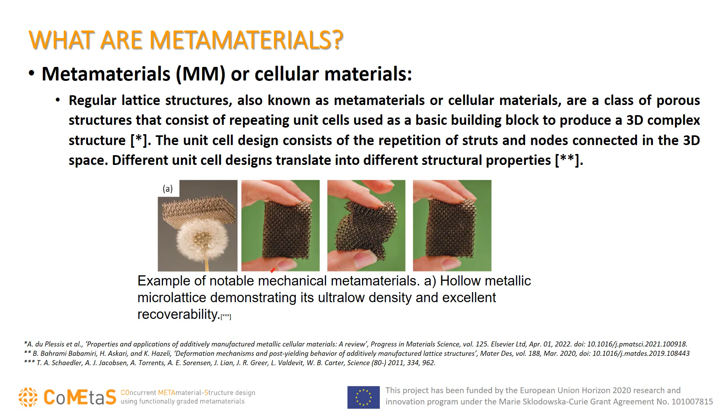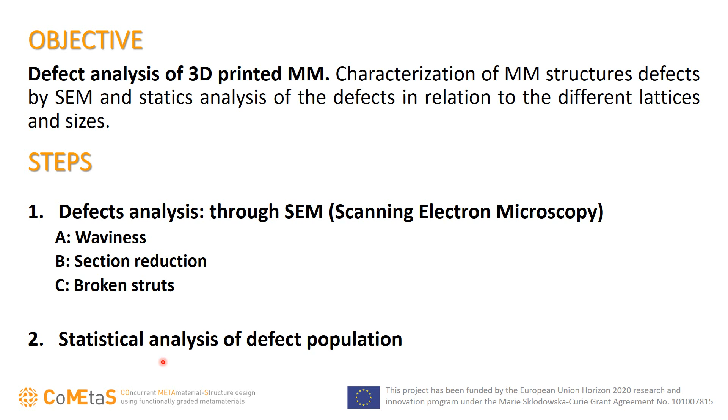The objective of my stay was to study defect analysis in the 3D printed metamaterials. Defect analysis was carried out by scanning electron microscopy, which covered the examination of 3 types of defects within the lattice structures: waviness, section reduction, and broken strut. A comprehensive statistical analysis was then applied to assess the population of the defects, which provided valuable information on the structural integrity of the materials.

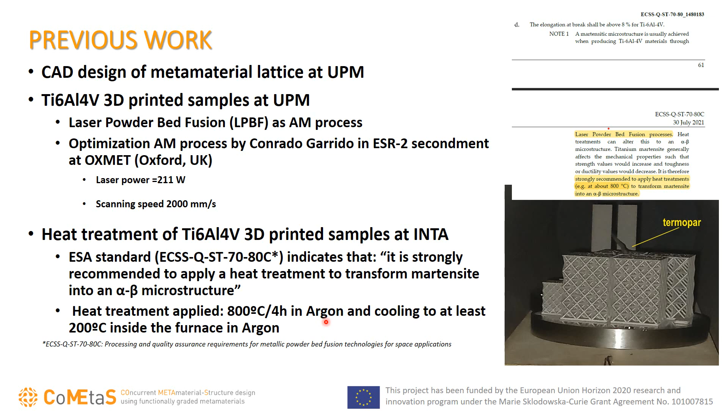Prior to the stay, preliminary work had to be done, which consisted of the design, the printing, and the heat treatment of the lattice structure, which we can see here. The lattice structure was designed and manufactured using laser powder bed fusion technology at the Polytechnic University of Madrid, then heat treated at 800 degrees Celsius for 4 hours in argon atmosphere at the National Institute for Aerospace Technology.

This is the list of the lattices which present various structures that we can see here. The study covered 4 different lattice geometries that we call unit cells, representing the metamaterial structures: FCC, face centered, octet, cubic, and fluorite. And here is the photograph of the samples that I took with me to Georgia Tech.

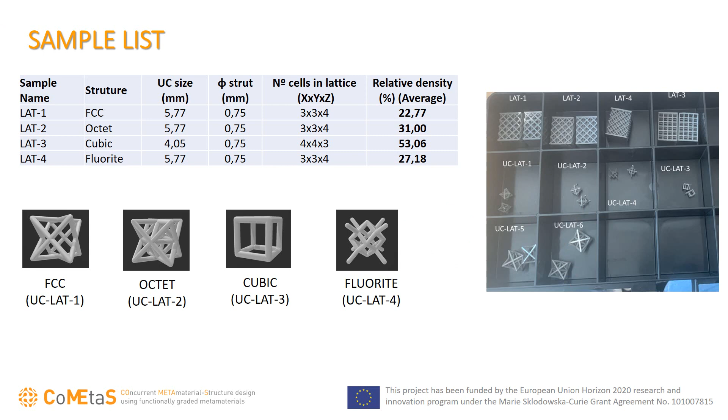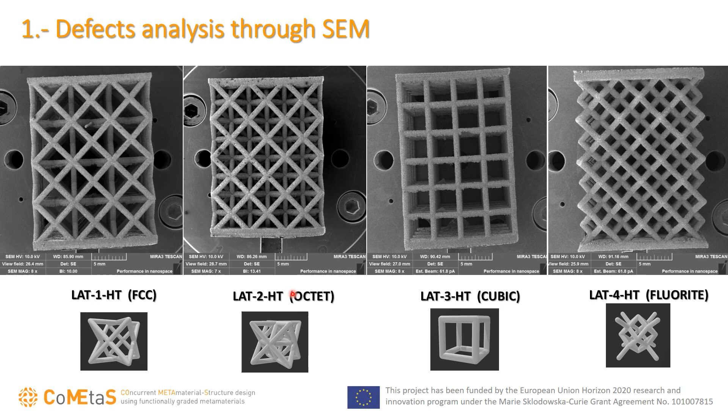Later, during my stay at Georgia Tech, I studied the defects with the SEM. These are the SEM images showing the 4 types of unit cells. As an illustration, only one of the 4 faces is presented here, but meticulous inspection was carried out on all 4 faces. These 3 images that we can see here are examples of the result of defect inspection in the SEM. The SEM images showed defects in samples of waviness, section reduction, and broken strut.

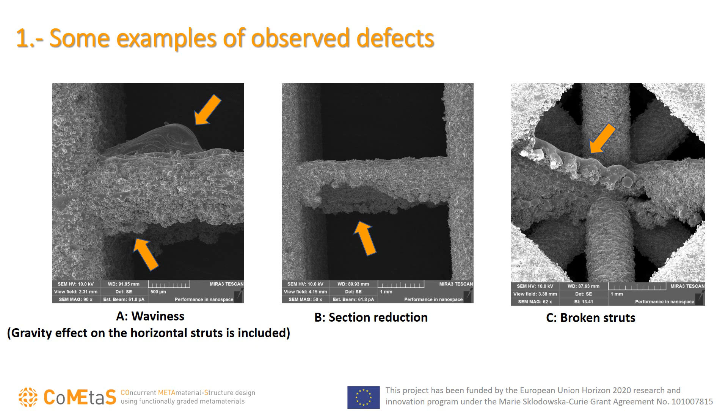A general defect was also observed, the effect of gravity on the horizontal struts, that strongly affects the waviness. Also, other general defects were observed, such as unmelted particles on the surface and the previously mentioned effect of gravity on the horizontal struts.

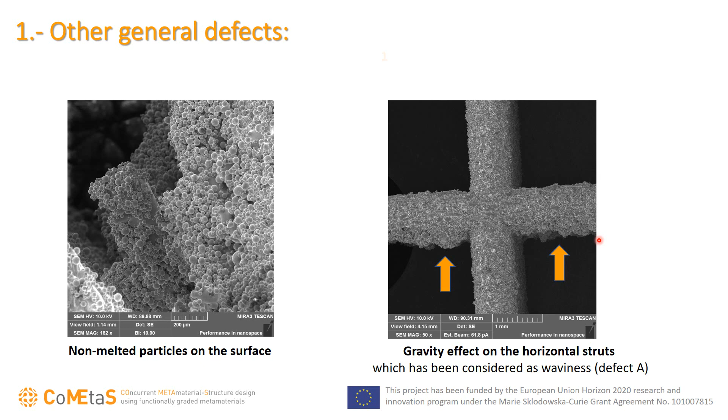Then section reduction defects are most prominent in the horizontal orientation as well. In particular, lattice 1 stands out with the highest incidence of section reduction defects among all lattices, underlining the importance of addressing this specific defect type in this orientation. Broken strut defects only manifest in the horizontal orientation. Notably, lattice 1 shows the highest number of broken struts. As a general conclusion, strut orientations play a significant role in determining the types and severity of the defects. For instance, all lattices present more defects in the horizontal orientation, except lattice 4. It does not have any strut in the horizontal orientation.

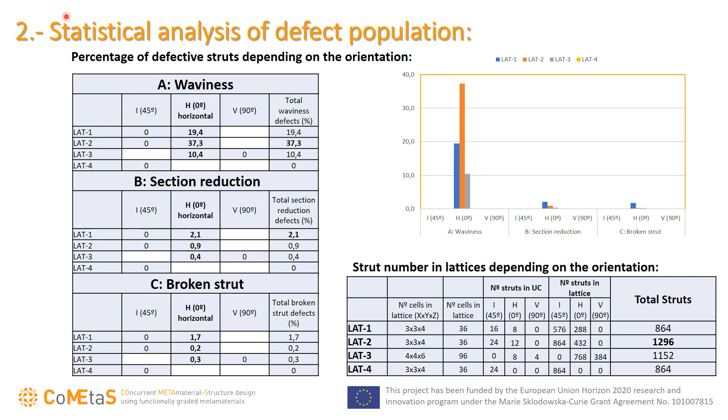To conclude, 4 different types of lattice structure have been designed in order to study the relationship between the defects and the 3D printing input parameters. A defect analysis study was performed by SEM to analyze the defects on the additive manufactured metamaterial structures. The defects were classified into 3 groups: waviness, section reduced struts, and broken struts. Other defects not included in these groups were observed, such as the non-melted particles on the surface.

The application of statistical analysis contributed to a better understanding of the combination of lattice orientation, number of struts, and defect type. Lattice orientation plays a significant role in determining the types and severity of the defects. For instance, all lattices exhibit more defects in the horizontal orientation except lattice 4, because it does not have any strut with the horizontal orientation. To conclude, the impact of this experience on my career has been substantial. The knowledge and the skills that I acquired during this secondment will contribute to my future productivity.

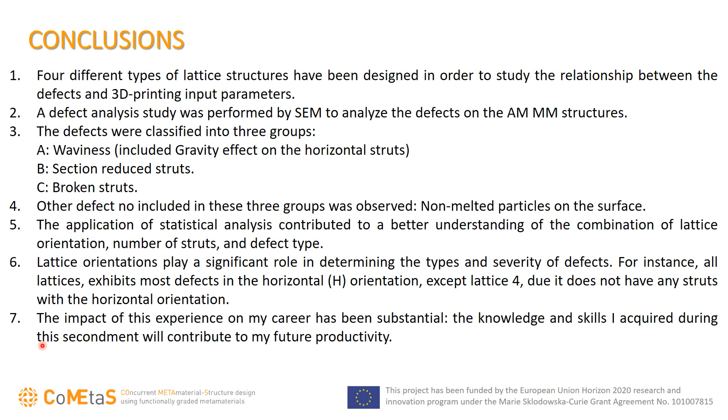Some future actions are still needed. The research study paves the way for future actions aimed at advancing the understanding of the defect-microstructure relationship and its impact on material performance. Some compression tests in partnership with UPM are going to be carried out at INTA, and an exploration of the microstructural features using EBSD to correlate defects with microstructural and mechanical properties is also to be performed at INTA. One journal paper will be published based on the research conducted during this period, completed by future actions.